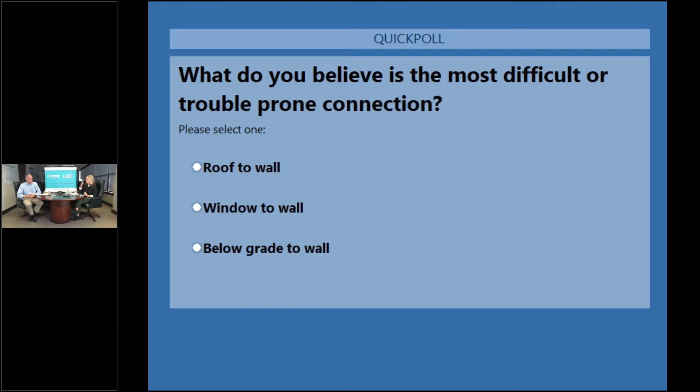When I think of things like what we like to provide, like standard details, I feel I can make a standard detail for the roof to wall or even a below grade to wall. When I get to that window to wall, standard kind of flies out the window.

So thanks everybody for those that were able to answer that question, and I'm glad we gave you some options. So we've got roof to wall at about 43%, window to wall 45%, and below grade to wall about 12%. That's great, I like the difference we got from that poll.

I think we often think roof to wall gets perhaps overlooked the most, meaning it might not be the most complicated, but perhaps it gets less thought. You're right, and I definitely see that - that's one of the conversations. If my kids were sitting here, they'd say, 'Yes, Mom, we know,' because when we drive around, if I see the roof membrane flapping in the breeze, it definitely breaks my heart, as I'm sure it does to a lot of you on this call with us today.

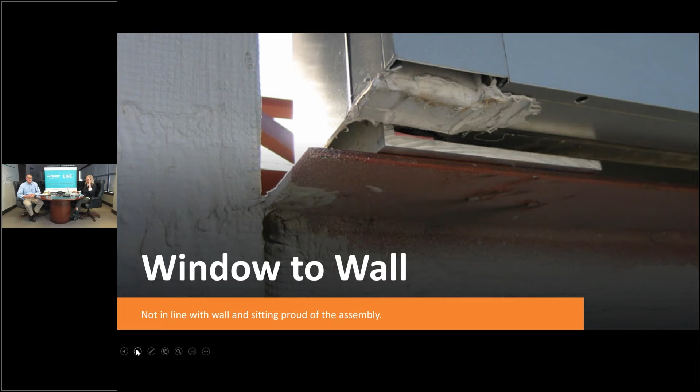So as we look at that window to wall, and we take the complexity - why I voted for it is demonstrated here in this picture.

So not only does that complexity exist, it happens multiple times all over your structure. So your roof to wall connection, yes, we need to make that, but it's not going to happen as many times or in as many different ways all over your structure.

Same thing with the below grade wall. There's going to be different variations and concerns for that, but I think this is a great bird's eye view of the complexity of how we make that connection.

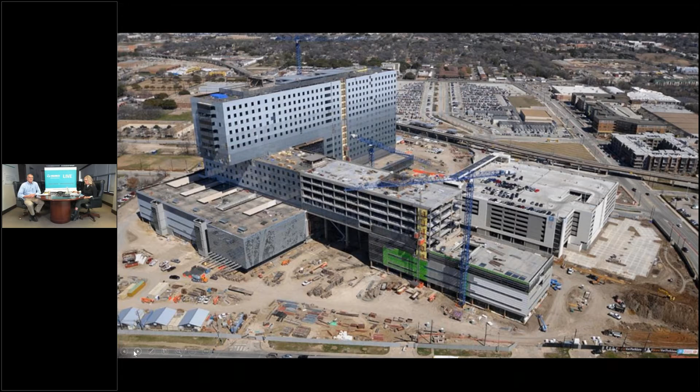And this is the project we're going to be talking about today, so we won't steal any more thunder by talking too much about it. What's really cool here, I wanted to announce that yes, we are talking about Parkland, and this is from several years ago. One of these pictures here, I left the date on it so we could all see that it was 2013. I know when you think about a design phase, it took many years before getting to the stage that picture was taken at in 2013.

And I want to give a major shout out to Ken Krieger. Ken is our rep out of Dallas, and he provided me with not one folder, not two folders, but three folders of information and photos. Lots of documentation, lots of information. And another shout out to Peter Portier, because a lot of what we did on this project involved his expertise on designing that ability to make that connection.

Yeah, Peter and his team are often the unsung heroes behind a lot of these projects. Absolutely, critical role there with what they provide. And just a few more pictures here of that ongoing work.

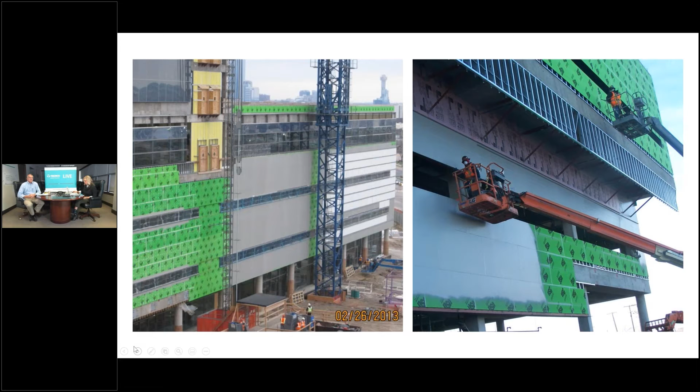Hey everybody, how's it going? Awesome, good, great, how are you? Doing good, happy to be here. I'd like to apologize in advance if anybody hears any loud barking, because I do have two rather large dogs and I get deliveries from Amazon from time to time, and it's that time of day, so.

Of course, right? This is when they will deliver. I was doing a presentation the other day on Murphy's Law, so I almost want your dogs to bark now because I think it adds a little more levity.

Well Chris, thanks so much for being able to be a part of Tremco Live today. Researching you and your experience, you've got almost 24, well I guess when this was done almost 25 years just at Corgan Associates. Tell us a little bit about your experience in the industry and of course at Corgan.

Yeah, actually I guess in total I've got about 30 years experience. Graduated from Texas Tech University in 1990, the Bachelor of Architecture 5-year degree program there, and worked at a small firm for about 5 years, got my license, and then went to work for Corgan. I was probably project architect and project manager for about 8 or 10 years. Our lead in technical design retired around that time, and I've been writing specifications for, I guess, the last 15 years since then.

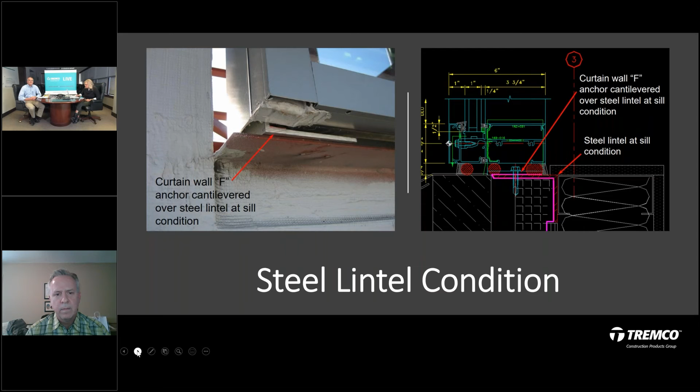Absolutely, and I think this picture talks about that. So working closely, they suggested shortening the lintel, and that allowed for these molded corners to help out with that. But even with this, we needed to take what we designed and help fabricate in the field to make that connection as well. So very versatile, I think, when utilizing something like this.

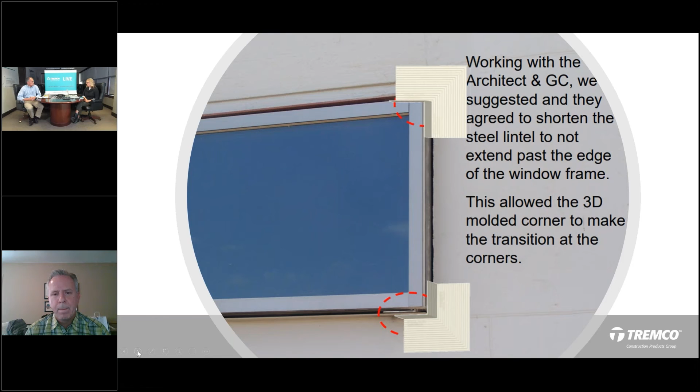Yeah, it always amazes me, Marcy. There's really no geometry we've not been able to make on a custom basis. Well, and I think custom is key, right? Because everything's going to be a little different once you get out into the field.

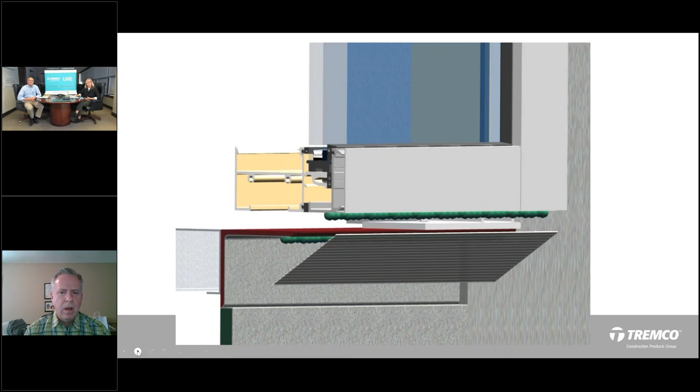And I think these pictures here, the animation, we always like to talk about the animation. Did you find this helpful? Because it really does help tell that story, Chris, being able to see how it comes together. Yeah, I think it's certainly helpful for people that aren't really familiar with the system and how it works. It absolutely does, because it's a sequenced installation thing. It's great.

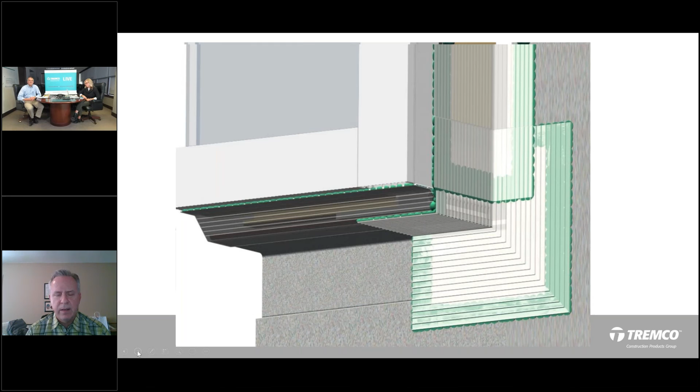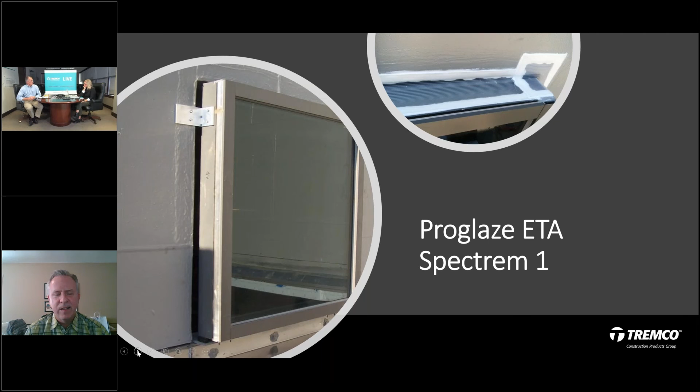It brings it to life, and I love seeing it brought to life, right? So here's a couple more pictures of just those connections, making it from the window to the wall. Yeah, we think of the animation as actually part of the deliverable. So we've got quite an investment in people and talent to create those.

Well, yeah, that's one of the things that I really like about this system, and another way I have seen this approached. Matter of fact, we had another rather large project recently, which was so big that the GC split the glazing contract between two different glazing contractors. And of course, we wrote the specs like we always did with the ETA as a transitional membrane.

We kind of got into it, so one glazing contractor chose to go that route with the ETA as specified. Another one was insistent on using a stainless steel shadow box that projected out. But the problem with something like that is you seal around the shadow box, seal that to the air and weather barrier, and then seal the shadow box to the curtain wall. The problem is all that stuff has to be made in the shop, and if it doesn't fit when it comes out into the field, then...

You have to figure out how to make it fit essentially. With something like this, and I guess that's why Ken's so partial to that image on the right, you just work around it. I mean, construction is a bit of an inexact science. Sometimes you've got to allow a little bit of tolerance. A stainless steel shadow box doesn't allow that, but this is just so flexible that you can pretty much work around anything.

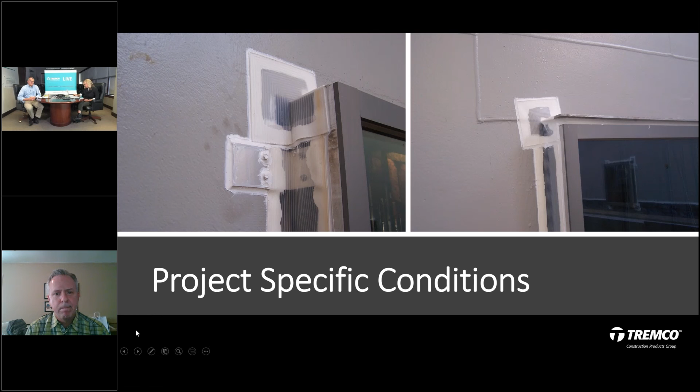When we look at that collaborative approach and that environment and how critical it is from a design perspective, especially when you're dealing with something like healthcare, is there any key takeaway you'd recommend to anybody watching when it comes to healthcare construction and design? I'd say one of the biggest concerns with healthcare, this is a concern for any building, but even more so with healthcare, is certainly air and water infiltration, because you don't want any mold or anything like that to grow inside the wall assemblies in that kind of sterile environment. So that's probably one of the reasons why we took a systems approach and why we had so much field observation and testing on this building in particular.